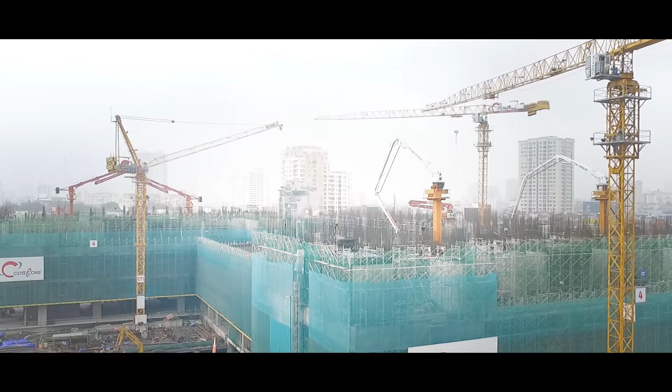Dawn is rising. The massive buildings are being hurriedly constructed. When the sun is shining, we will see the buildings reaching the blue sky like the strong rise of Vietnam. Being sustainable to last forever, Xuân Thành Cement is accompanying with various great buildings of Vietnam today.

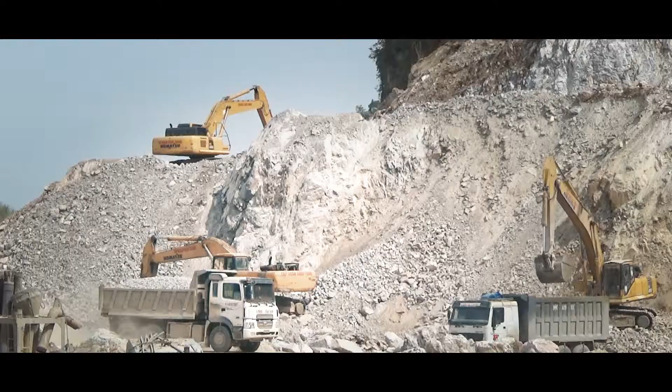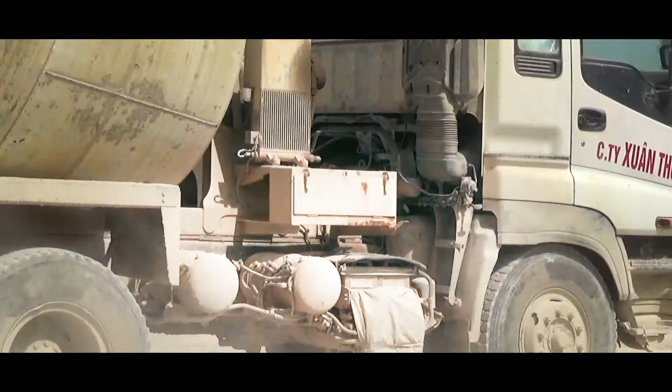Aiming to produce cement of international standard quality for construction with reasonable price in Vietnam, Xuân Thành Group has pioneered selecting new state-of-the-art technologies worldwide for the construction of modern cement plants in Vietnam. One of the projects being built is Xuân Thành Cement Plant Phase 2, with the largest capacity worldwide of 12,500 tons of clinker per day and state-of-the-art technology and equipment. The plant is included in the Master Plan for Cement Industry Development of Vietnam for the period 2011 to 2020 and orientation towards 2030.

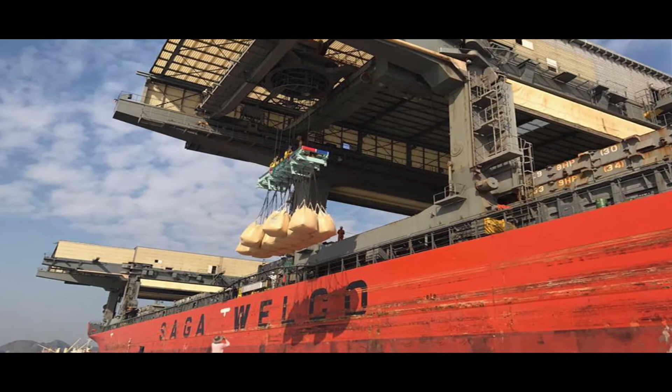How have Xuân Thành engineers constructed such a large cement plant with state-of-the-art technology?

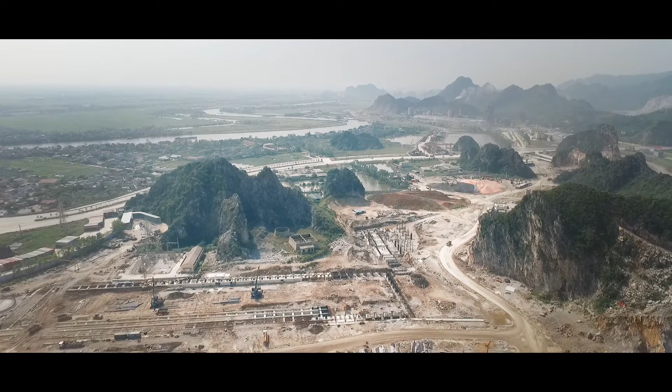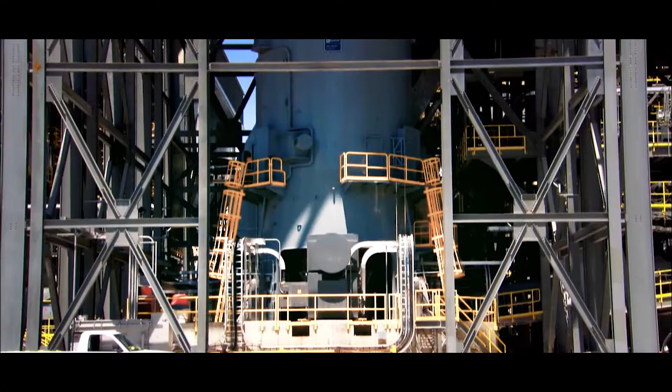After a period studying technology and selecting partners, Xuân Thành Group delegated a team to survey the largest cement plants worldwide and study cement equipment suppliers. Through survey and evaluation, Xuân Thành Group decided to invest in a cement production project with modern technology and the largest capacity worldwide, selecting FLSmidth as the partner.

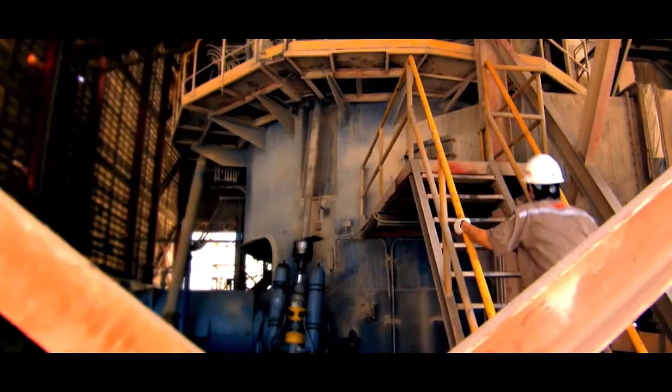FLSmidth is a leading global supplier of equipment and services for the cement industry and mineral sector, and also completes the construction of such plants. FLSmidth has offices in more than 50 countries. The company has more than 130 years of experience and more than 15,000 employees around the world.

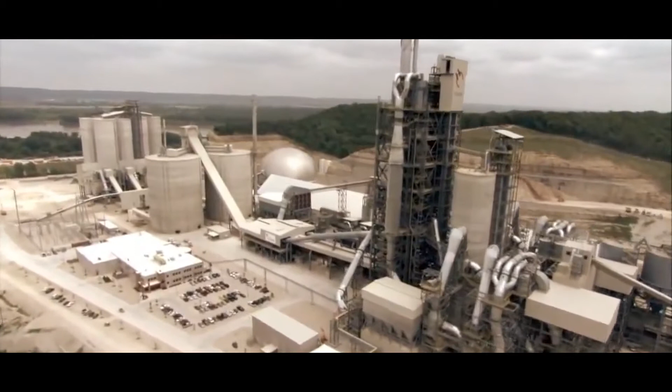FLSmidth built the Holcim cement plant in St. Genevieve, Missouri, United States, with a capacity of 12,000 tons of clinker a day. It was the world's largest cement plant at that time.

On May 23, 2015, Xuân Thành Group and FLSmidth signed a contract with a value of more than 10 trillion Vietnam dong to build a complete cement plant. Simultaneously, Xuân Thành Group has signed contracts with 4 banks of Vietnam for this project construction.

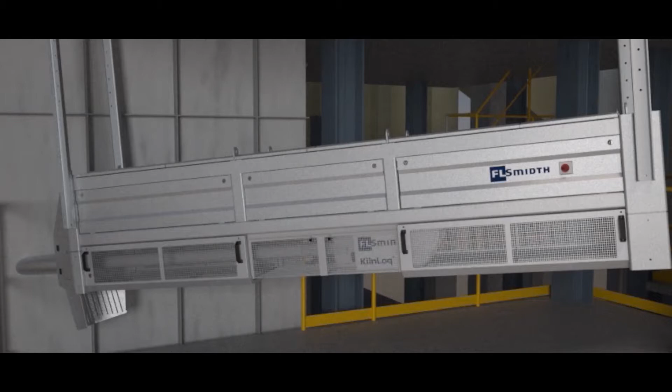Xuân Thành Cement Plant Phase 2 is 60 kilometers further away from Hanoi. This will be the world's largest cement plant to be constructed in Vietnam. The production line will include energy-saving equipment, emission control system, and the most advanced control system. FLSmidth is very pleased to participate in the construction of this, one of the biggest plants in the world, with Xuân Thành.

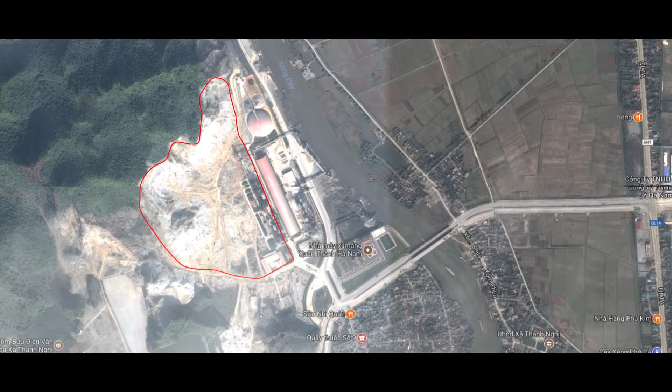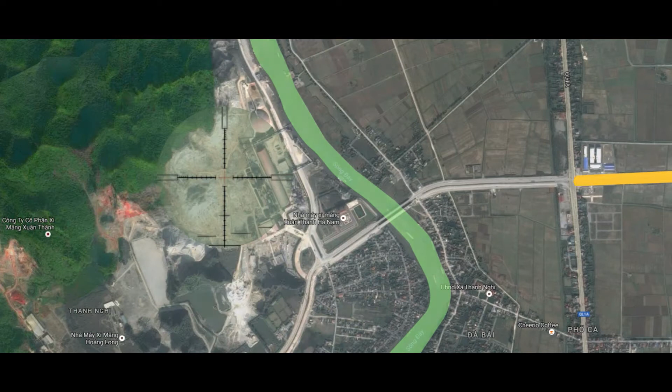Xuân Thành Cement Project Phase 2 is of an ideal location. Here, there is an existing cement production line of Xuân Thành producing cement with daily consumption of 8,000 to 9,000 tons for the market. Next to this plant group is Day River, with 240 kilometers in length, flowing through many provinces to Tonkin Gulf and Kim Sơn, Ninh Binh. The downstream of the river flowing through Hà Nam is considered the national river route.

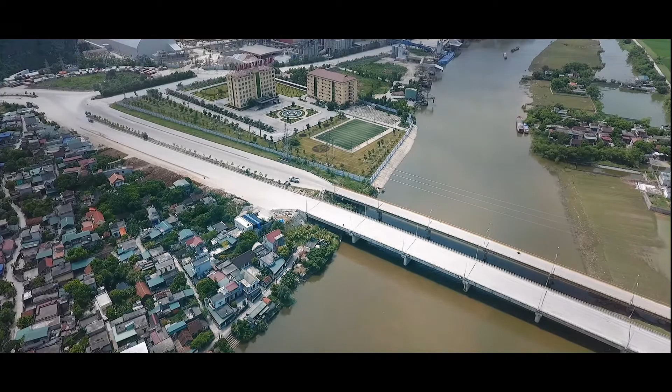Here, Xuân Thành has invested in a jetty complex to intake raw materials as well as dispatch output products when the plant is in operation.

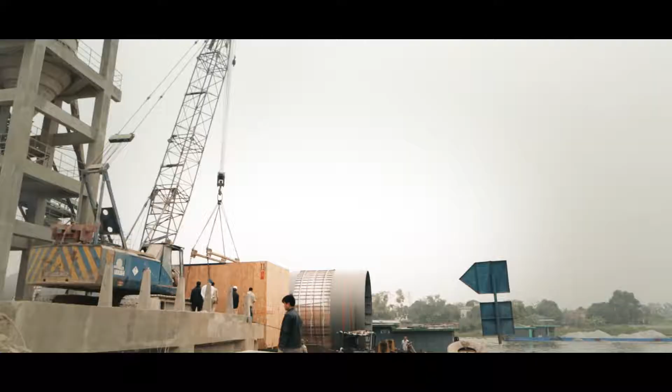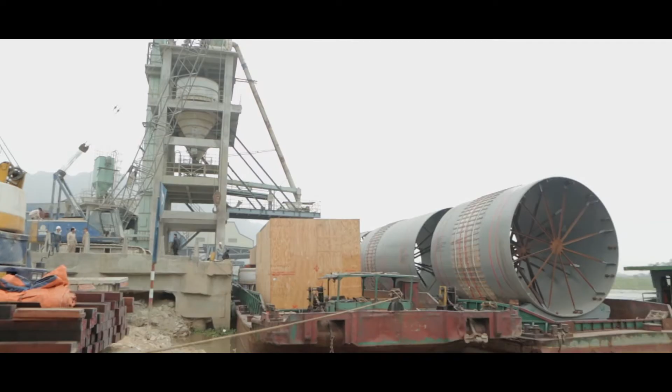Equipment assembled in other workshops and ordered overseas has been transported to deep ports of Vietnam by large vessels and then to the jetty of Xuân Thành cement plant by large barges along Day River.

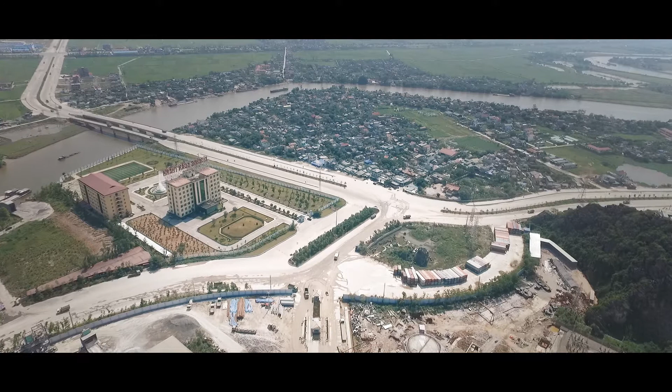A 2-lane wide road and a bridge crossing Day River were built to connect the highway and National Highway 1A of Vietnam, creating a very convenient road route for the plant to achieve economic efficiency in transporting equipment for construction, materials and finished products in the future.

Materials for cement production is the most important part of constructing a cement plant because it is directly related to quality and price of products. According to a survey by authorities, the total limestone reserve in Hà Nam is about 7.4 billion cubic meters, of which cement limestone accounts for about 4.1 billion.

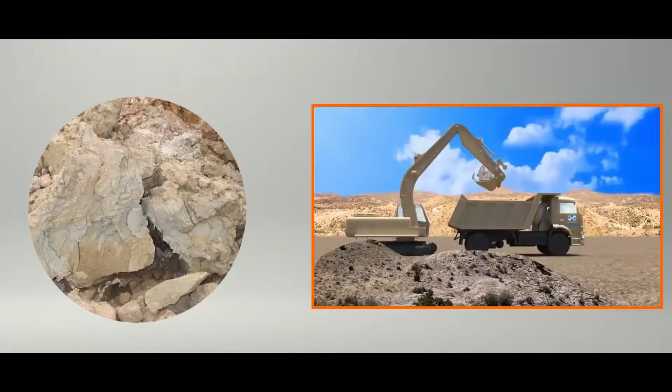Limestone is mainly concentrated in Thanh Liem and Kim Bang districts, with a reserve of over 800 million tons. If potential as forecast is included, total limestone reserve is estimated at approximately 52,044 million tons. Clay reserve used for cement production is estimated at 331 million tons. It is an impressive figure of resources to be exploited and used for plant production for more than 100 years.

This is the world's largest cement plant project, with a capacity larger than the plant previously built by FLSmidth in the United States. Highly qualified project managers of FLSmidth have joined the project from a very early stage, working continuously and closely with Xuân Thành engineers with detailed plans from the beginning of implementation.

The request from Xuân Thành Group is that FL Smith shall supply the latest technology, along with innovative and appropriate solutions, to ensure safety of the surrounding environment during construction and operation of the plant. After dozens of site surveys and calculating constructions and appropriate technology for environmental safety, FL Smith and Xuân Thành agreed on the most optimal construction plan, as well as contingency plans with criteria for continuous evaluation during construction.

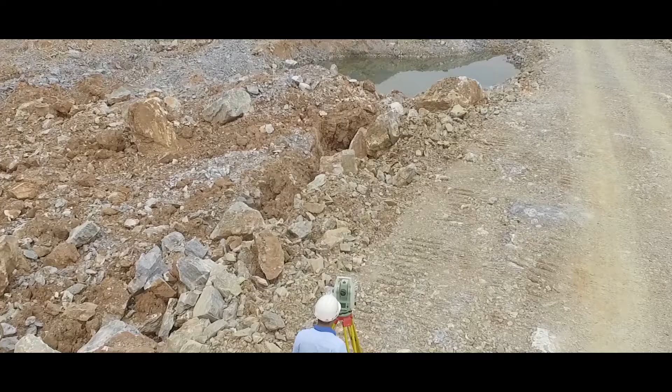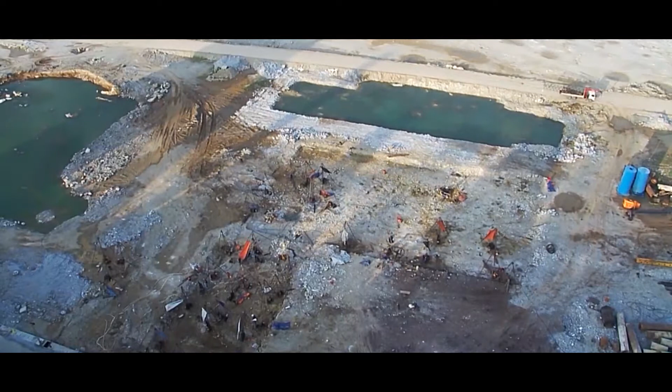Measuring and survey are an important part of construction, especially a construction with various large equipment and civil system with complex structure. Total length of probe drilling of all phases from pre-feasibility and strict investigation to detailed drilling is over 60,000 meters with more than 4,000 geophysical measurement points with minimum depth of 40 meters.

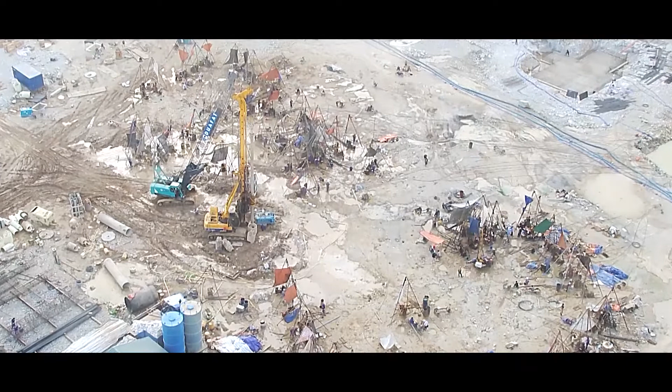Surveying work has been implemented continuously since investigation stage and during construction. Surveying parameters have been updated and processed on computer and updated to technical drawings implemented by one team of Xuân Thành engineers to ensure the correct geometry and design positions of building items.

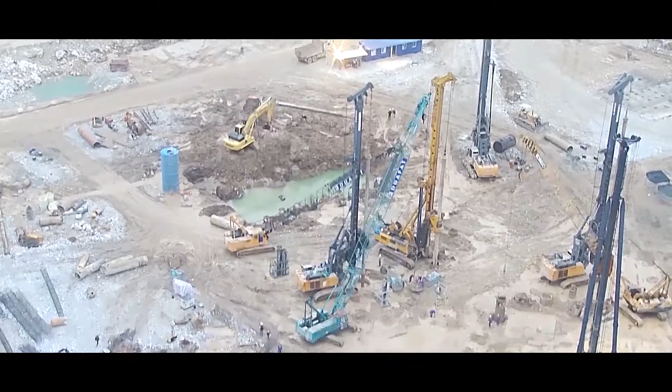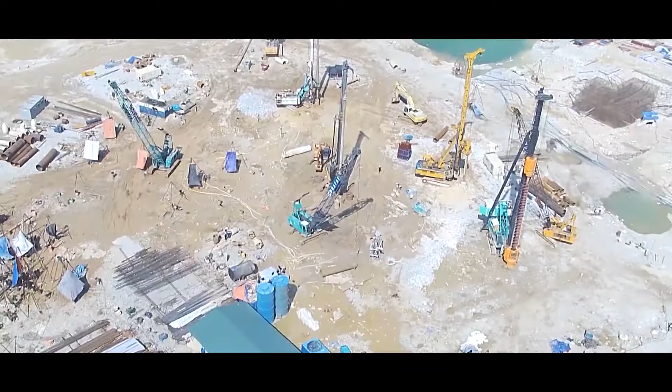Based on geophysical measurement data, the engineers calculated the executed bored piles under construction conditions of solid rock and karst cave. Bored piles are reinforced and sprayed with concrete by new technology. The construction has taken place in daytime and nighttime to create

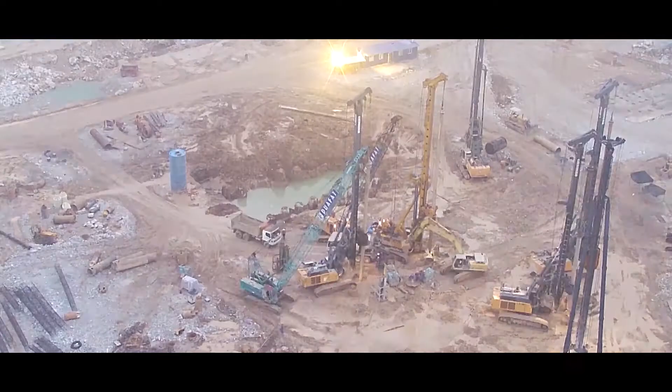1,474 bored piles with the largest diameter of up to 1,200 millimeters. The bored pile system has been calculated to create a solid and stable foundation for construction system and overweight items to be installed.

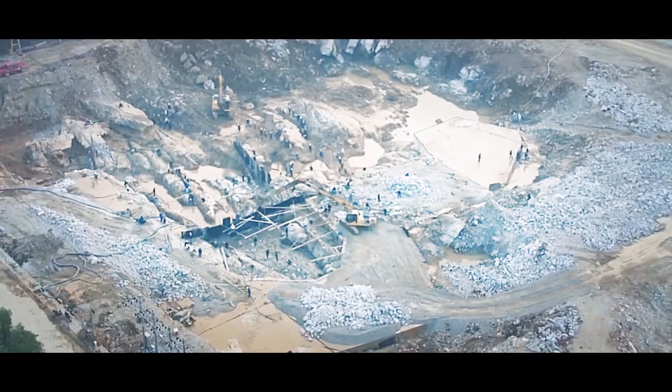All silos of the project were built using sliding formwork concrete technology. This technology created integrity of structure and no casting joints. It helped accelerate construction progress and finish fresh concrete surface with high quality.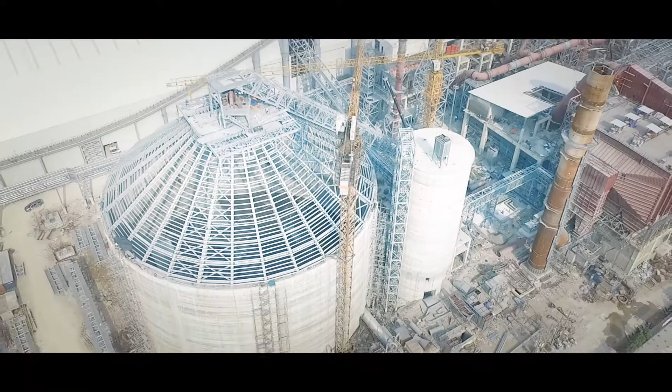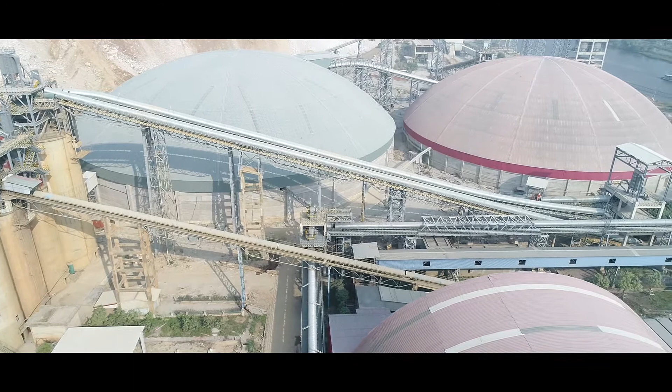Silos of the plant were completed earlier than scheduled, thanks to advanced technology and continuously and timely provided concrete from our neighbours' plants. To ensure the best quality of clinker for producing cement and exporting to international market, the plant has invested in constructing 3 clinker silos with capacity of over 300,000 tons. Clinker and cement are exported to the plant's port by automatic conveyor system with capacity of 1,000 tons per hour.

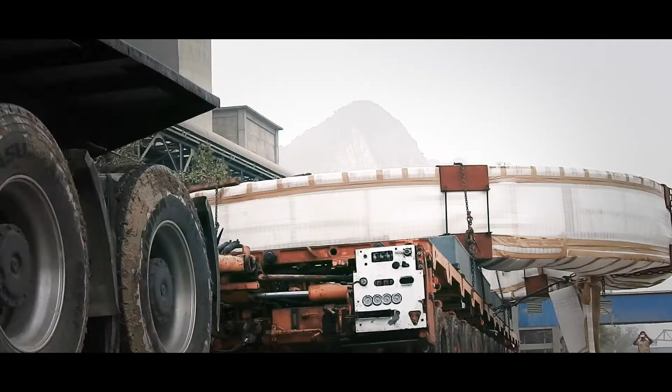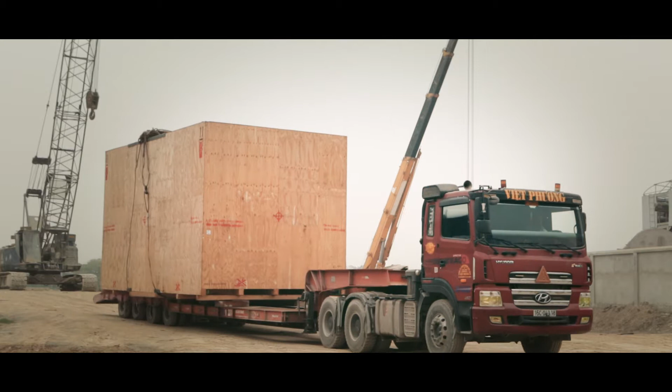The project has many oversized and overweight equipment, so transportation by road has partially satisfied the demand for transportation of equipment with size and weight in accordance with road standards of Vietnam. Therefore, transportation by sea has been used at maximum level to transport these equipments. The use of the river jetty requires calculation of tide for unloading equipment from ships in the port.

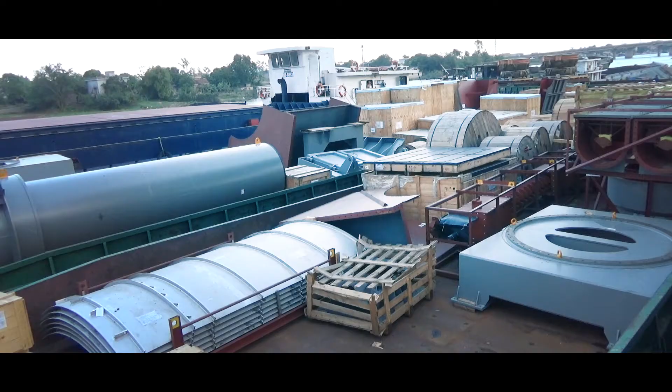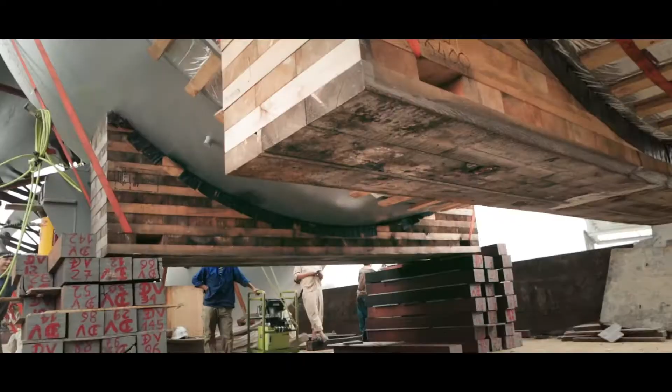Xuân Thanh engineers have been always ready, regardless of day or night, to choose the right time for unloading oversized and overweight equipment and transport them to the construction site. Sometimes it is not possible to use crane unloading equipment from barge onto trucks to transport to warehouse or pre-assembly sites because of limited space of jetty. Therefore, each barge arrival would be a meticulous work taking many days and nights.

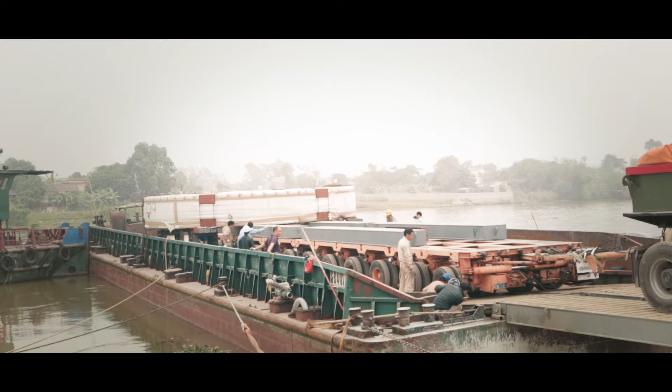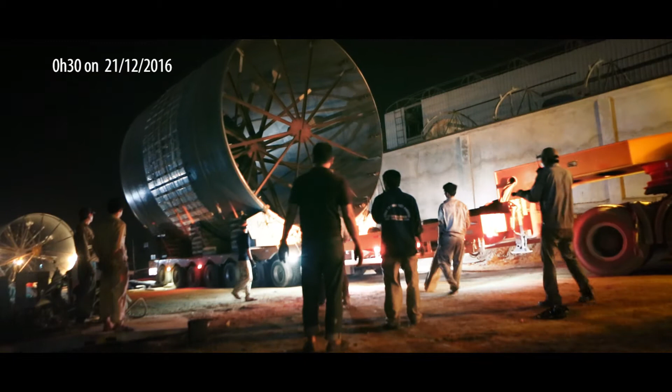A steel bridge was transited from the riverbank to barge at right tide, allowing a specialized vehicle to go onto the barge. Hydraulic jacks with hundreds of tons capacity were arranged together scientifically to lift equipment onto the vehicle. Moving by every millimeter, the vehicle would bring over 200 tons of equipment up to the riverbank and then to the warehouse.

FLSmidth specialists have been always available on site to give assistance and guide during installation. Xuân Thanh site team have been responsible for planning as well as monitoring quality of site work conducted by dozens of different contractors. In order to avoid unexpected events during installation at the construction site due to the failure in supplying of any details, FLSmidth and Xuân Thanh together carefully inspected after receipt of goods and prepared all facilities, manpower several months

before installation. Time schedules and updated erection sequences made by installation contractors have been submitted to Xuân Thanh. Besides, FLSmidth and Xuân Thanh actively conducted inspection before erection. Thus, it helped saving time by avoiding any last-minute unexpected events by resolving all problems before installation.

The most important factor in construction activities is high concentration on safety issues. Xuân Thanh and FLSmidth have had a good preparation to ensure safety for people and equipment. As you can see here, we are building a big factory and we have to deal with big equipment, so safety is our first priority.

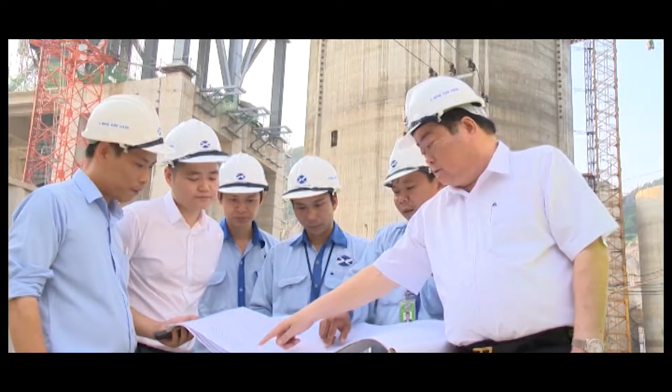Senior leaders of Xuân Thanh Group have been always present at the construction site to grasp and follow up all construction stages, especially in important periods. The board chairman of the group was present at night to encourage all officers, engineers and workers working at the site. It was a powerful source of motivation for work to be performed accurately, effectively, with excitement and enthusiasm.

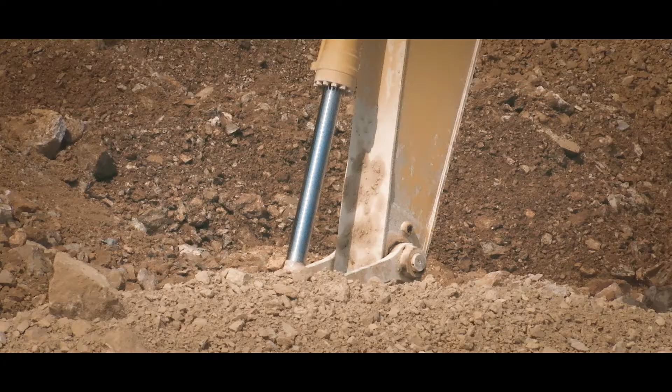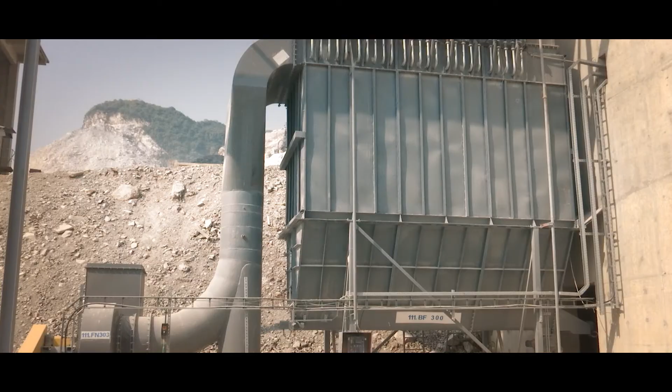System of limestone crushing plant, argillaceous rock crushing plant and additive are constructed and installed according to the most advanced technology of FLS with the complete capacity of 3,200 tons per hour. From this crushing plant system, material will be collected and sent to storage by automatic conveyor system.

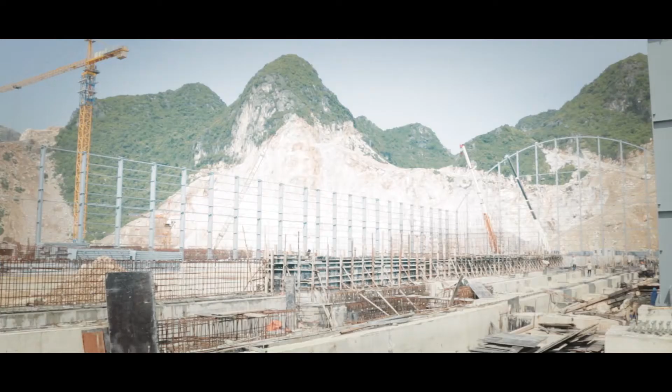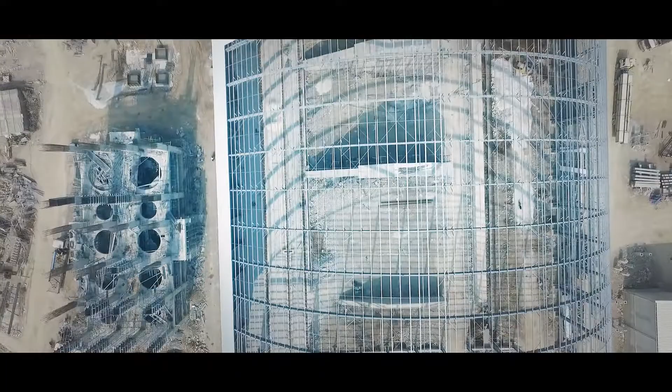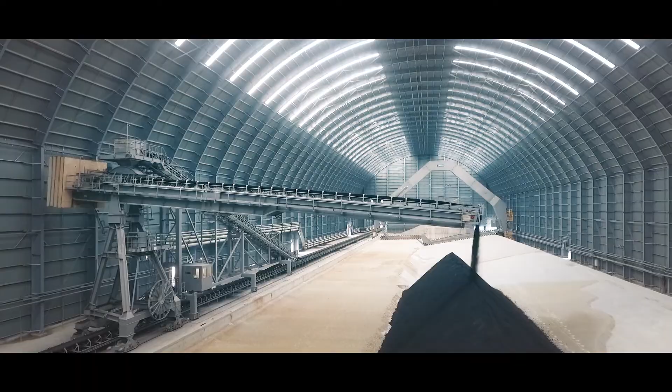Storages of raw materials with the area of nearly 50,000 square meters. The United States standard was applied for design, and they were constructed with prefabricated steel frames and perpendicular structures. The construction of storages with pre-engineered steel frames was of high accuracy, uniformity and stability. The feeding system, hydraulics, travelling system of reclaimer inside storage are modern equipment with the latest technologies designed for large capacity, satisfying the plant capacity.

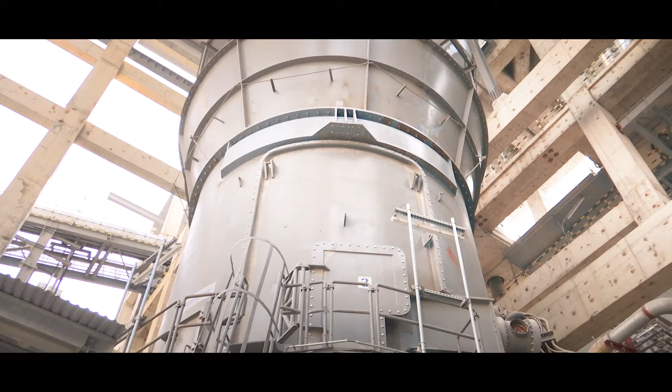Two raw material grinding mills, ATOX 50, with a capacity of 1,000 tons per hour, have been installed to ensure adequate material for the kiln system with a capacity of 12,500 tons of clinker per day, which could reach up to 15,000 tons of clinker per day. Fine raw meal will be transported through an air slide system into the raw meal silo.

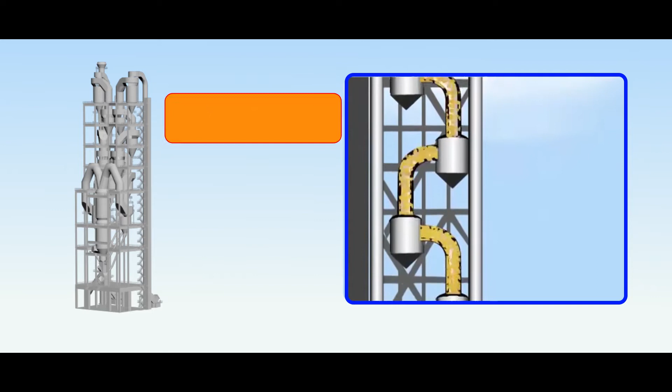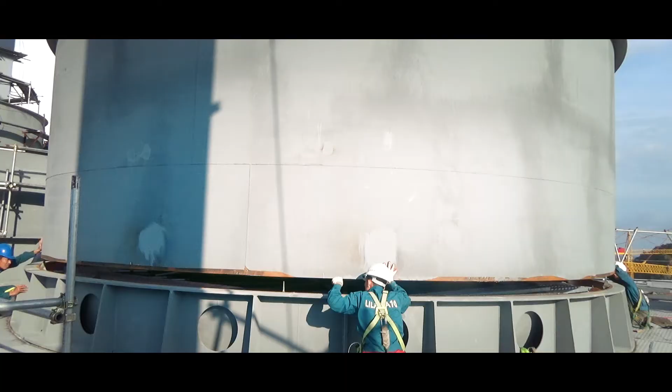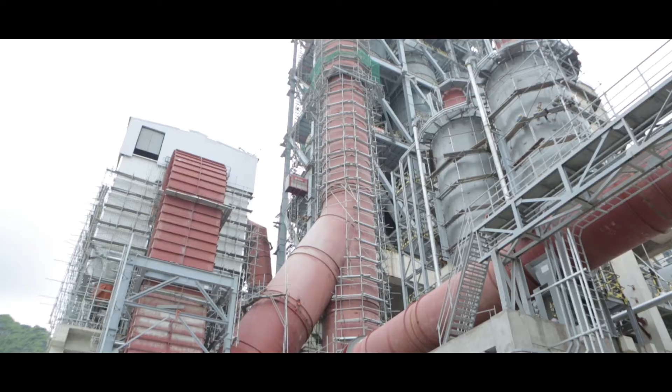The plant has a 4-string, 5-stage preheater, ILC calciner with 3-pier kiln and MMC cooler. The preheater was made of steel structure and consisted of large components manufactured abroad and transported to the construction site, as mentioned at the beginning of the film. Huge cranes were mobilized for installation of the preheater under strict supervision by FLSmidth engineers and the Tang supervisor team. This is the preheater with the most modern technology worldwide, designed by FLSmidth. The preheater has high efficiency, stable operation and is energy saving.

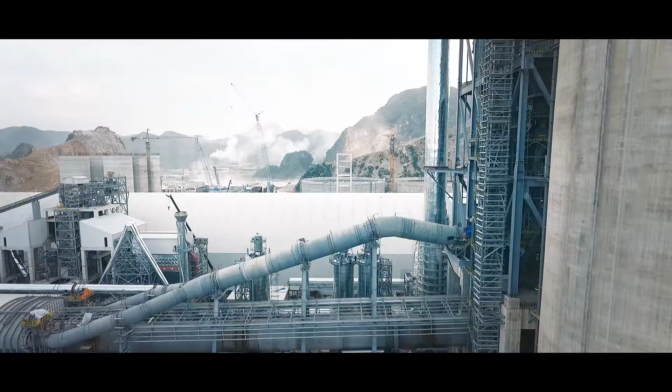Heat from the preheater and kiln shall be recovered for the purpose of generating power of 24,800 kilowatts. This will be conducted by Anhui Conch Kawasaki Engineering Company Limited, which has signed a contract with Tang. Waste heat recovery power used for production will save 30% of energy for the plant, reducing national grid load. It will contribute by reducing production input cost, reducing product price, and enhancing brand value, thanks to environmental contribution by greenhouse gas emission reduction.

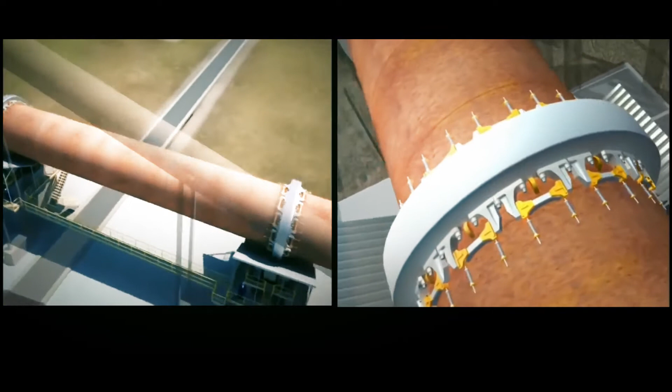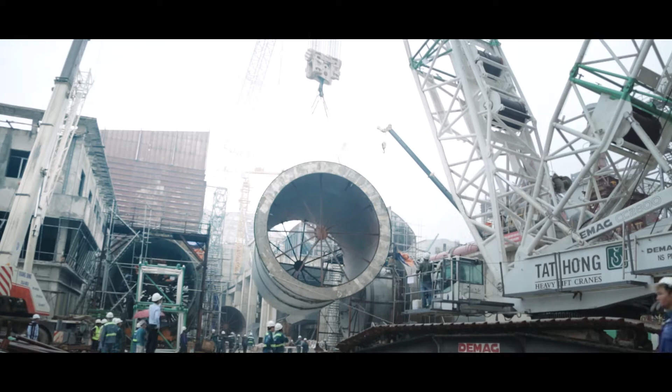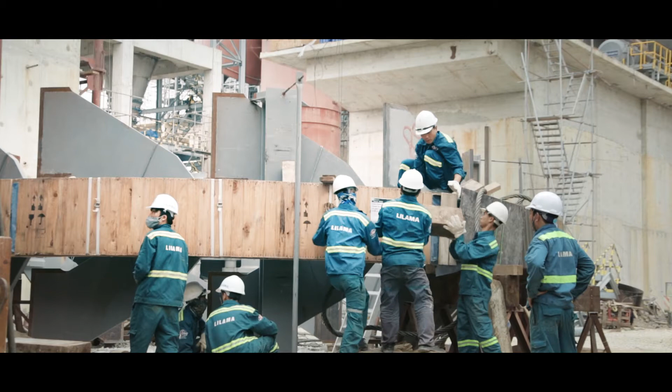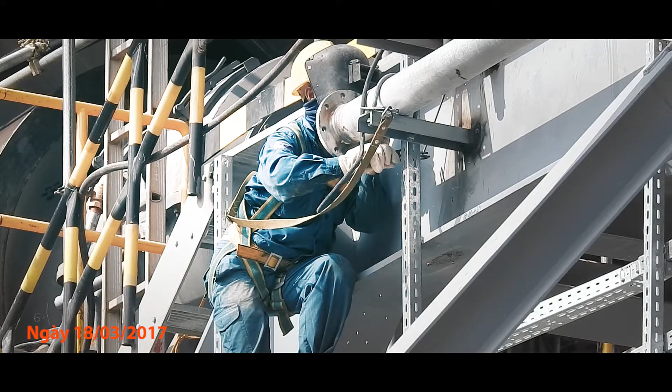The burning process taking place in the kiln always plays a especially important role in product formation. Tang's clinker kiln has an inner diameter of 6.3 meters and a length of 97.7 meters, designed capacity of 12,500 tons of clinker per day, with possible actual capacity of 15,000 tons of clinker per day. The kiln has a weight of 1,900 tons, using FLSmidth's most advanced technology to effectively control emissions of NOx, SO2, CO, and volatile organic compounds.

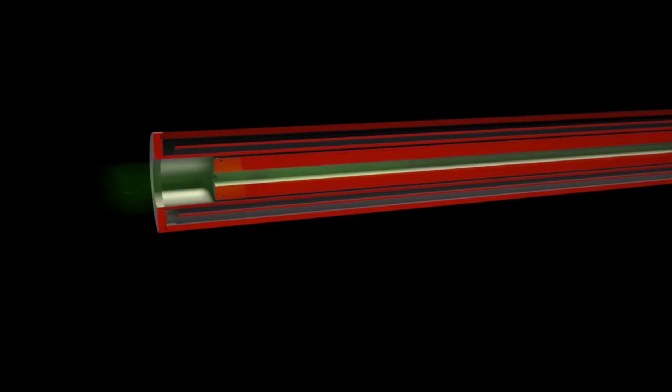The design of the kiln lock system of gas analyzer at kiln inlet and calciner by FLSmidth is simple, reliable, and granted patents around the world. The kiln lock helps improve kiln efficiency and energy conservation. This design allows easy maintenance and cleaning of the probe.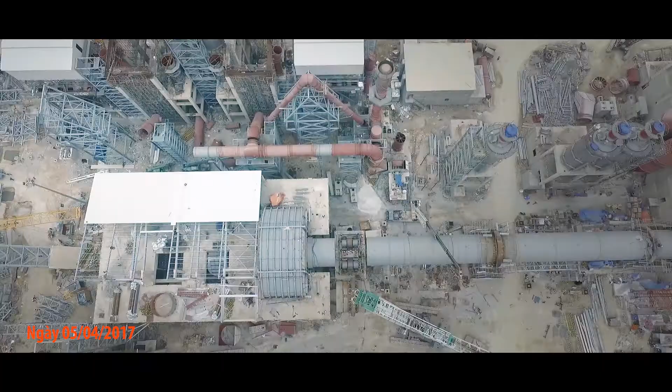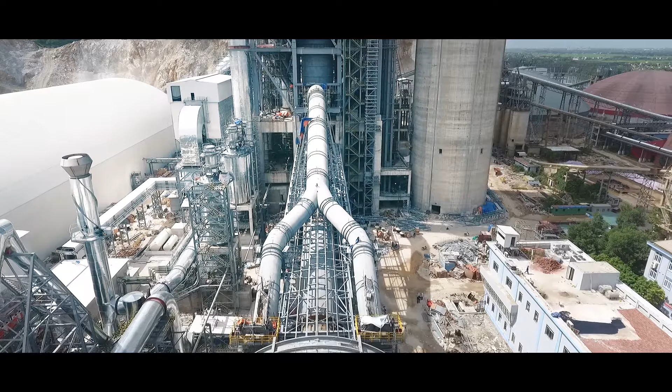Supporting rollers were integrated with the kiln shell. The biggest, of 320 tons, was installed at 24 meters height. To install such a roller, a crane with lifting capacity of 600 tons was used. On April 5th, 2017, the last kiln block with a 250-ton kiln tire was installed in its place, completing mechanical installation for the clinker kiln section, ensuring safety, quality and efficiency, and ahead of schedule.

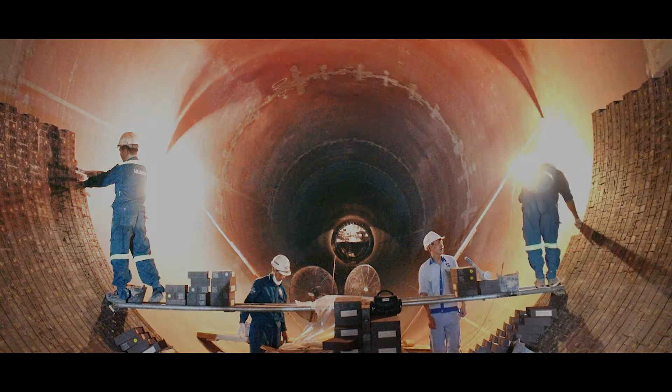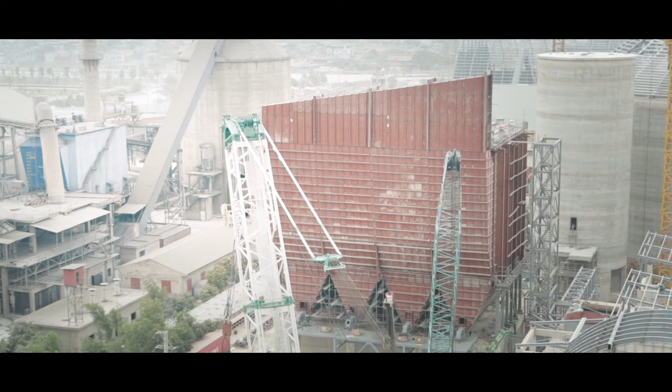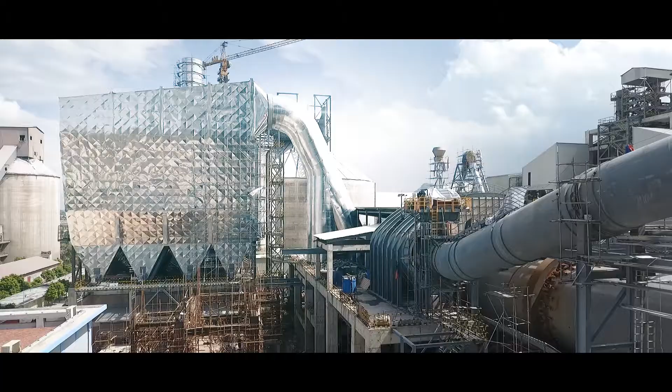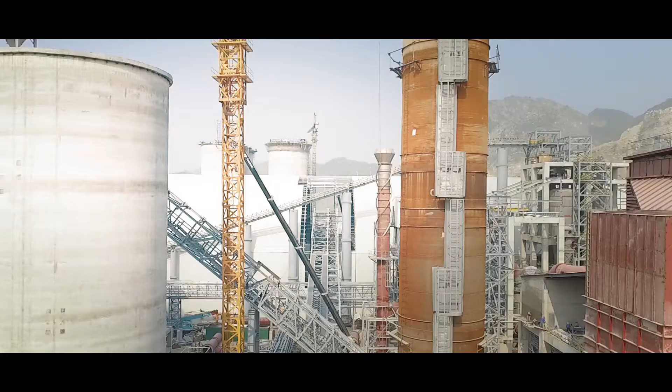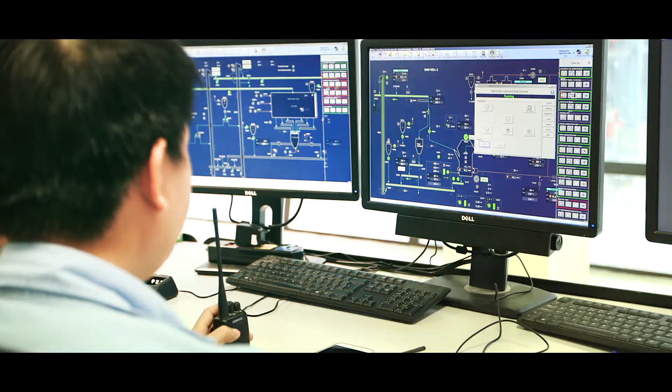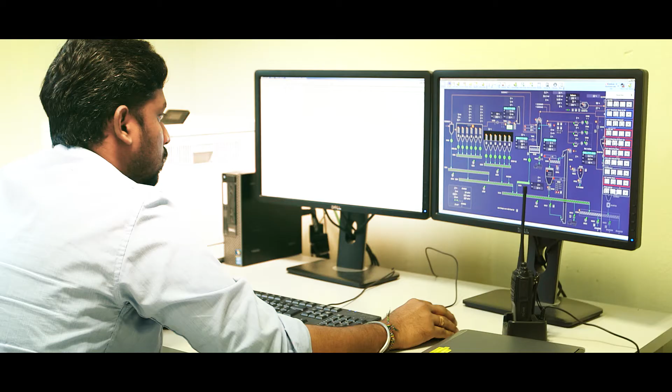The operating center of the plant is like the brain that determines the smooth and safe operation of the entire plant. The operation of all equipment in the production line is monitored and controlled in the central control room, which is completely automated. The whole system is connected through 20,000 meters of specialized optic cables. The modern distributed control system, DCS, automatically controlling and monitoring the whole plant production process, has been supplied by Siemens of the Federal Republic of Germany. It is DCS that enables operators to control the production process quickly and accurately, resulting in stable and high-quality products.

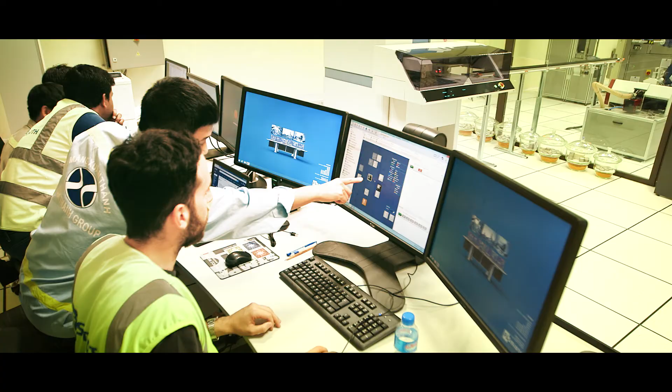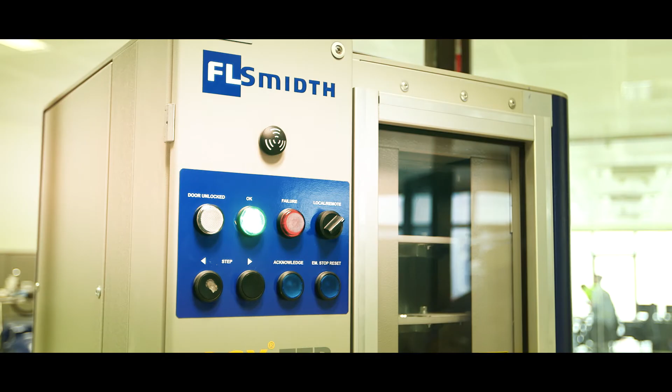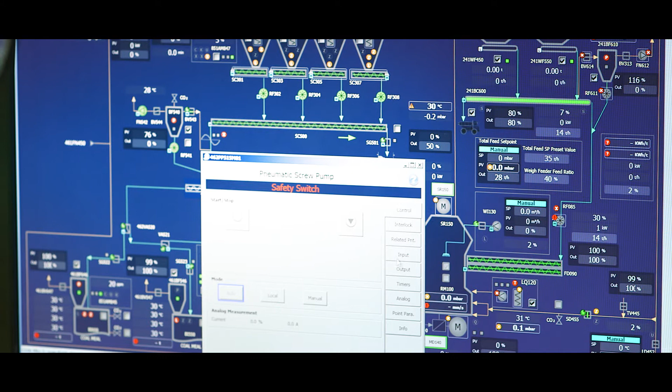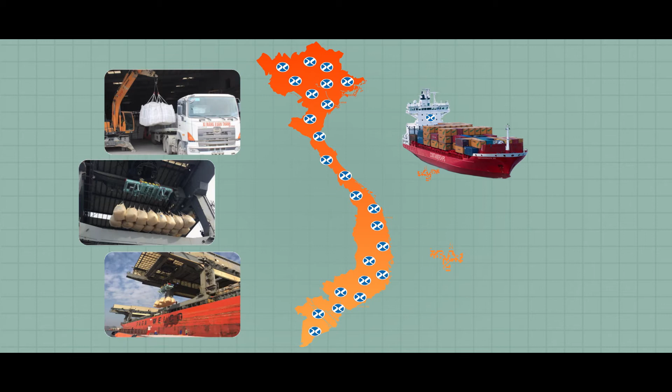The raw mix material system is controlled online from the product quality control room via X-ray system, the most advanced and newest one. In addition, the QCS system connecting to dosing stations through DCS helps enhance and stabilize product quality. Laboratory equipment of European standard, including an X-ray analyzer from Switzerland, shall analyze input materials and monitor product quality quickly and accurately. By controlling finished products in each section, Xuan Thanh has brought the best quality products to customers. The completed plant has increased the capacity of Xuan Thanh cement in Hanam to 5.5 million tons of cement per year to be supplied for the nationwide market and exported to many countries worldwide.

Project execution time schedule was targeted within 24 months, but with our potential and strength and great support and assistance from the central to local authorities, especially leaders of departments of Hanam province, within only 22 months, all staff, engineers and employees have worked hard day and night so that the plant was completed, ensuring technique, quality and safety for people and machinery 2 months earlier than scheduled. During the construction, there have been many great historical marks of employees.

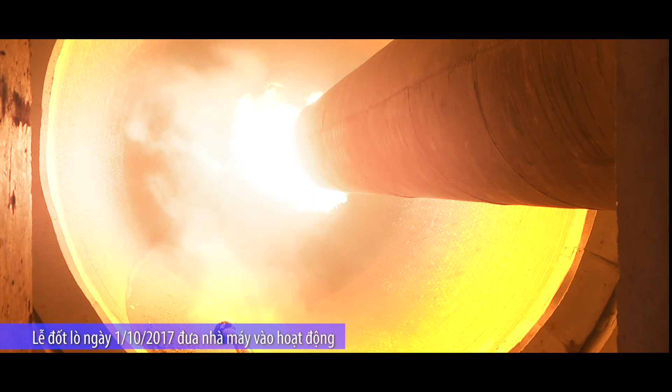On behalf of Xuan Thanh Group, we would like to express our sincere thanks to the leaders of the Communist Party, state, ministries, cities and provinces all over the country, especially Ninh Binh and Hanam provinces, all credit institutions, and partners who have trusted, supported and accompanied the group to achieve such good results today. A cement plant with the most modern technology worldwide has been formed by teamwork of the engineers of Xuan Thanh and FLSmidth, showing the strength of a leading group in Vietnam. It is not only the pride of all staff, engineers and workers of Xuan Thanh Group, but also the pride of Vietnamese people who are gradually constructing wonders for Vietnam today.